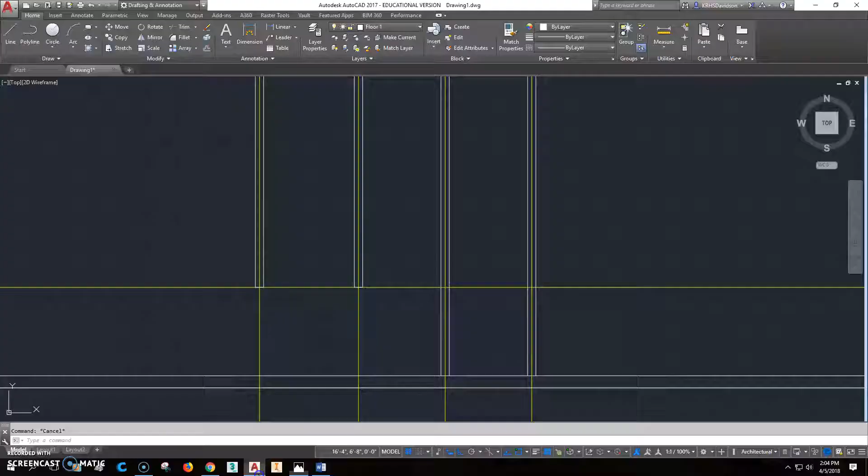Let's see, we've got 7'4" from that end of this bathroom to this end. So let's offset again, 7 foot 4 inches. Go down that way. That looks awfully big, but we'll be okay. Offset 2 inches. Offset 2. I'm going to go ahead and just draw lines over top of those. Alright, and I'm going to erase those two. Alright, so that's where that bathroom's going to be.

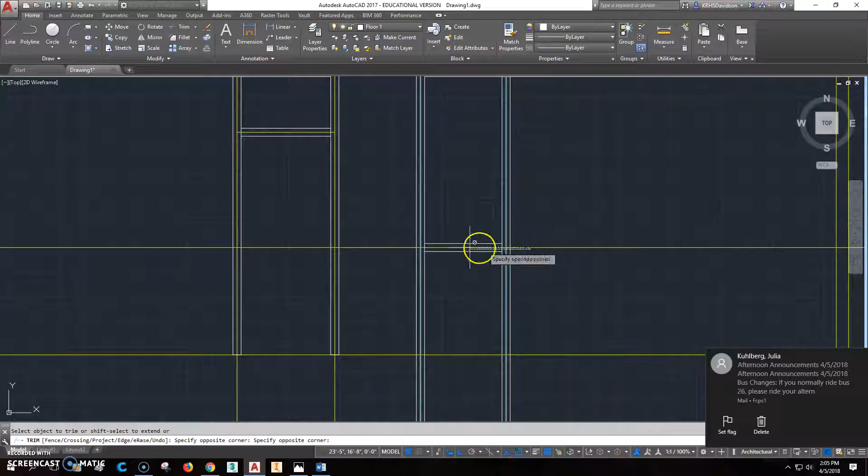So then how far down is that other thing? We've got a closet right here that's 2 foot 6. Alright, so to kind of clean that up, I'm going to do the same thing I did before. Nothing lines up with that, and this is going to make this a little easier. So we'll go ahead and click trim. We'll use this as a cutting edge and this as a cutting edge. Right click and get rid of that part, and that part right there.

And then we can do this. We can go ahead and click copy and right click, click a base point this way or move it that way. I already forgot what that number was. 2 foot 6.

Go this way. 2 foot 6 inches. Alright, so now we've established that distance. Alright. Okay, so now we've got that 2 foot 6 that way, so there's a wall right there. There is a little wall right here, so there's an opening less than that. This opening's, well, if this is 24, the countertop on there, then this is probably another 6 inches beyond that, so let's go ahead and make it 30. So we'll establish that this wall right here is 30 inches from there to there.

So we'll offset 30-inch wide here, from here to here, because that establishes where that opening is. So that means from here to here, right? That corner was a sharp corner there, yeah. So we'll go in here and we're going to extend, right click this, that one and that one. So click that twice to get those to go beyond that.

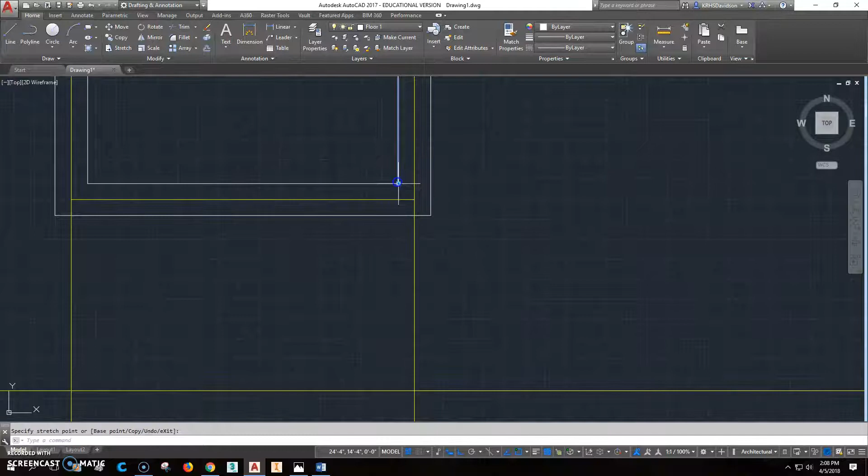So I'm going to click on this one, grab this grip, bring it back to here. Click on this one, grab that grip, bring it back to there. We've established now that that's where the closet is. Let's grab this one. Go ahead and go to this one right there. So we've established where this closet is. There's a restroom, a half bath right here. We go into the kitchen, it's right here.

Alright, so there's going to be some kind of wall right in here. It should be a 6-inch wall because it's between the garage and the kitchen. So let's go back to here, and we do have a 6-inch wall already established. I don't remember what that is. I'm just going to delete it. So now we'll draw a line that goes from here straight on up to here. I'll draw another line that goes from here up to here, although that's probably not right, because that wall should be 6 inches thick here too, but this one's not.

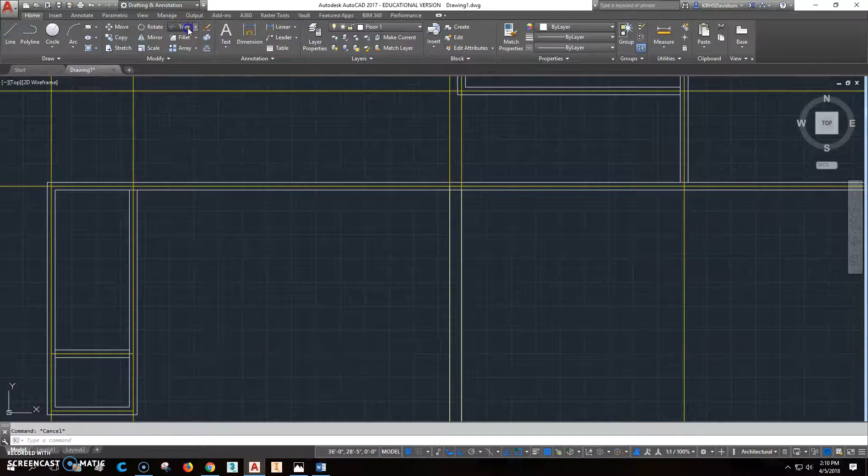So let's figure out that wall. So there's a 4-inch wall here, but it becomes 6 inches thick on this side. So we're going to establish that this is, we've established that's 4 inches. So I'm going to stop this in the middle of this 12 foot. I'm going to stop it right here by clicking trim, use this as a cutting edge, and we will get rid of that part right there. Alright. So now, that makes that a 4-inch wall.

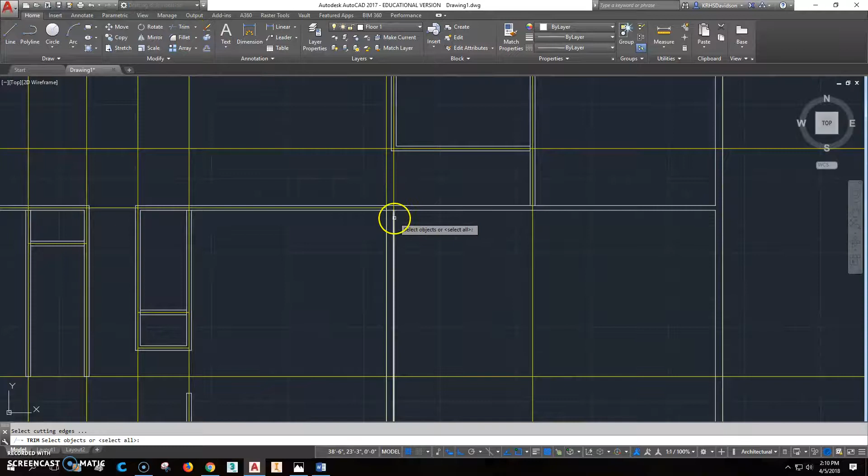This might put this in the wrong position. So let's do this. Let's go ahead and click trim, and we use this as a cutting edge and that as a cutting edge, and we're going to get rid of this. Actually, we should have done this. We should have used those as cutting edges and got rid of that.

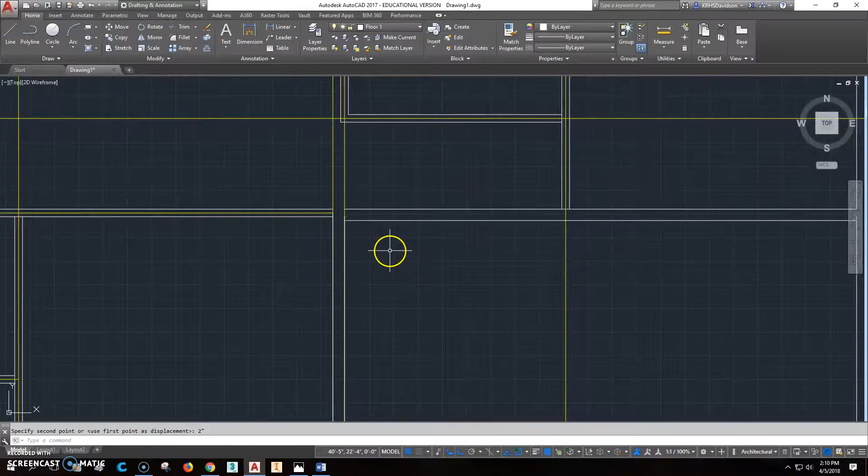Alright, so now that this is a 4-inch wall, we can literally just move this wall down right here, move it down 2 inches, and that puts it in the correct position. Grab that grip and move that one here, grab that grip and move it right here. Alright, so now we've got those established. Oops, got to grab that one too. Got to catch all those things. You want those to be right.

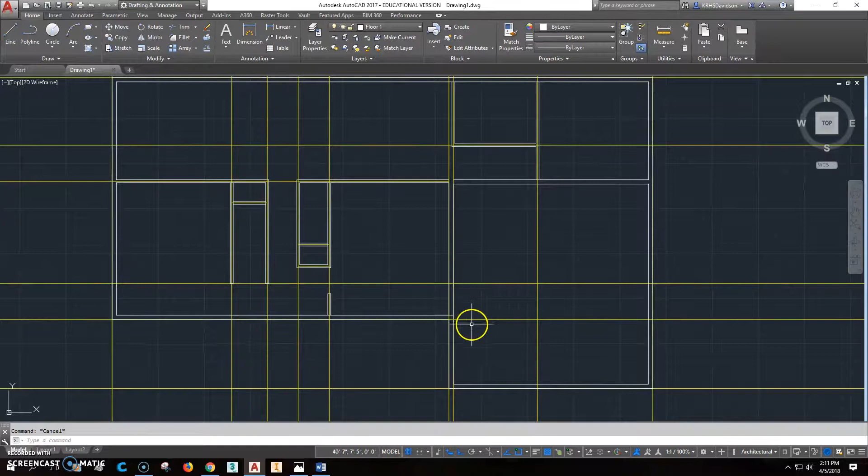Alright. Okay, so this is what I'm going to do next. I'm going to click the construction lines. I'm going to freeze them. So now we're going to go in here and start getting rid of this. Click trim, right click right away, and we're going to clean up all these corners and where these connections are around the whole house. Alright. Looks like I fixed something there.

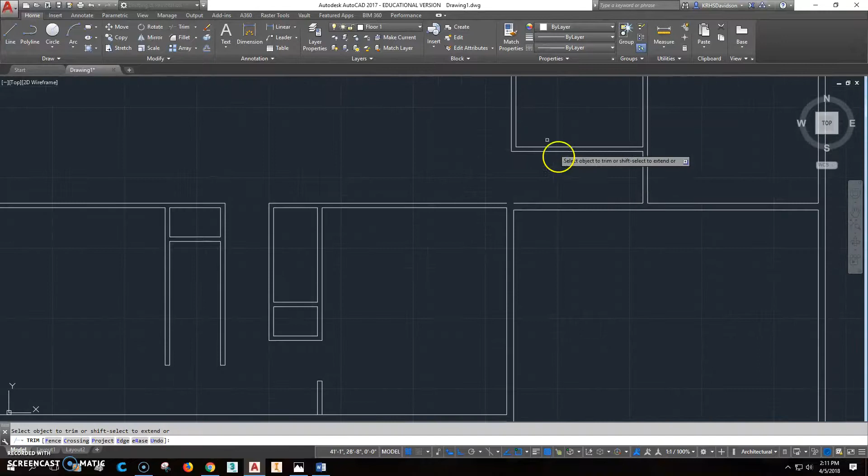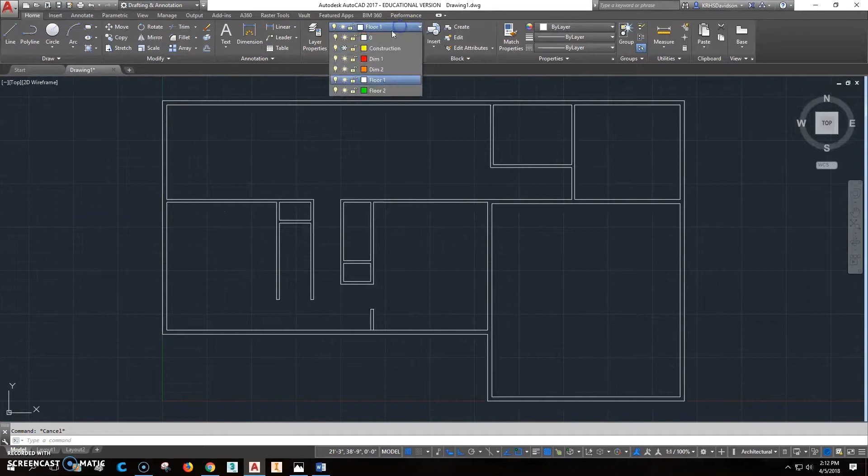Alright, so it looks like they're all right all the way around that house, except for this thing right here. We'll go ahead and delete that, and I'm going to click that grip and drag this one all the way out. Alright, so now that looks pretty good. Go ahead and turn that construction layer back on, so we've got all of our rooms established except for this one over here. I'm not going to worry too much about it yet.

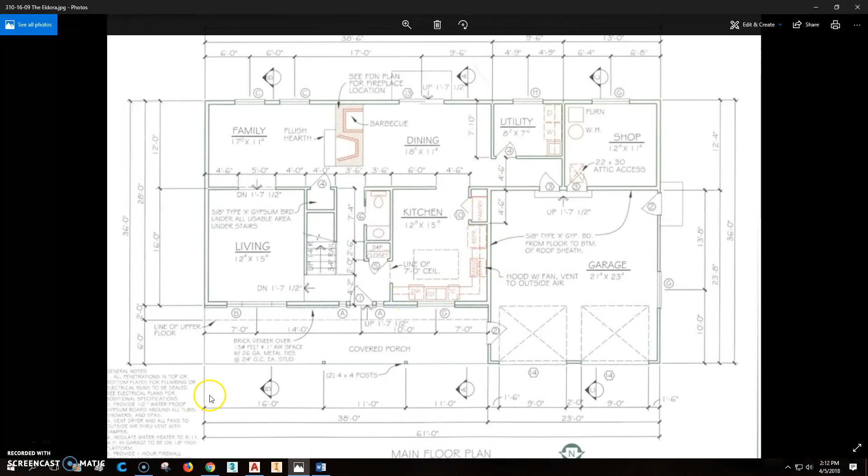Alright, so let's go ahead and start thinking about what we're going to do in the kitchen. We're going to go ahead and put this stuff in the kitchen. As a matter of fact, I'll stop right here and we'll do that in the next video.